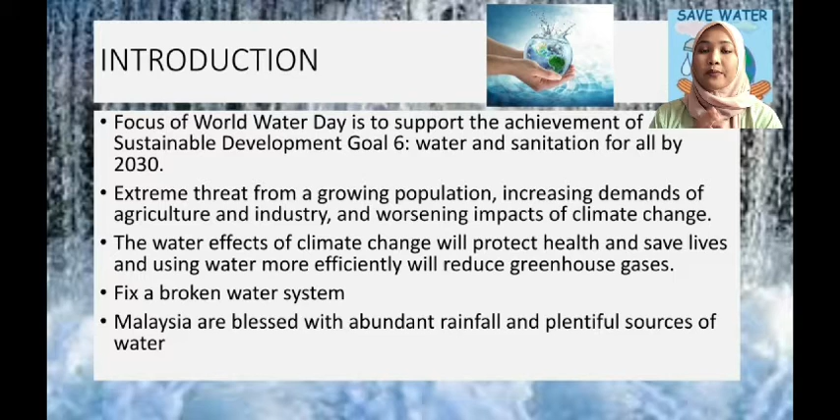Rainfall is seasonal and does not fall evenly throughout the country, as a result of typical rainfall characteristics as well as other climatic and physical factors which govern rainfall patterns. Malaysia gets an average rainfall of

2.94 meters per year. About 43% of that returns to the atmosphere through evaporation, 6% percolates into the ground, and the remaining 51% flows away as surface runoff.

The agriculture industry is the largest user of water, requiring up to 68% of total water consumption for paddy irrigation, other crops, livestock, and fisheries.

Lack of reserve water is the most important concern in most states. Each state must have a reserve margin of between 8% and 12% for the system to function efficiently. We can have more than 15% reserve water if the system is well planned and managed.

Unfortunately, our reserve is currently less than 2%, which is critical, because when a shutdown occurs, thousands of households have to go without water. Actually, we don't have a water shortage problem, but we have neglected upgrading the system.

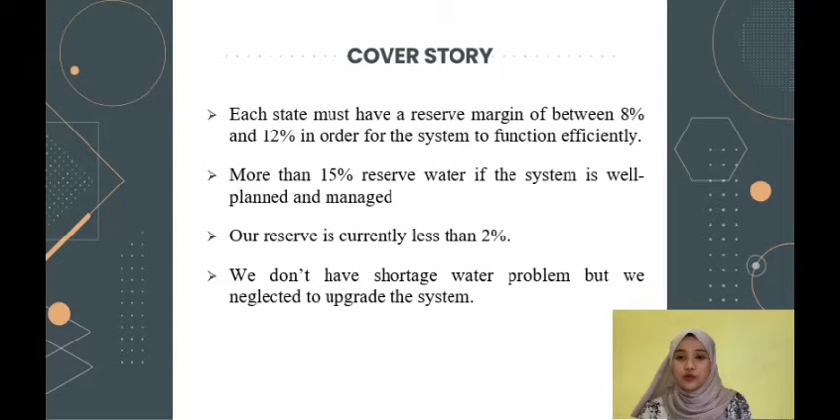However, with a reserve of at least 15%, the majority of households can have water supply for 40 to 70 hours in the event of a shutdown.

One of the most persistent issues in the local water system is non-revenue water. Non-revenue water is water that is pumped or produced but subsequently lost or otherwise unaccounted for in the system before it reaches the consumer. Non-revenue water levels are very high, with the national average at 35%.

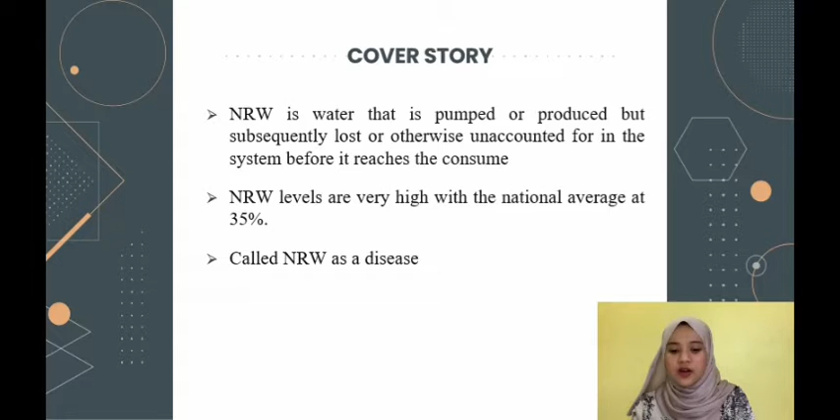Malaysia has developed a Water Demand Management, or WDM, to ensure more efficient and long-term water consumption. It is focused on reducing non-revenue water, using water-saving equipment, utilizing alternate water resources, and conducting water audits for large water users.

Actually, we should be using 170 to 180 liters daily, but each individual uses 220 to 230 liters per day.

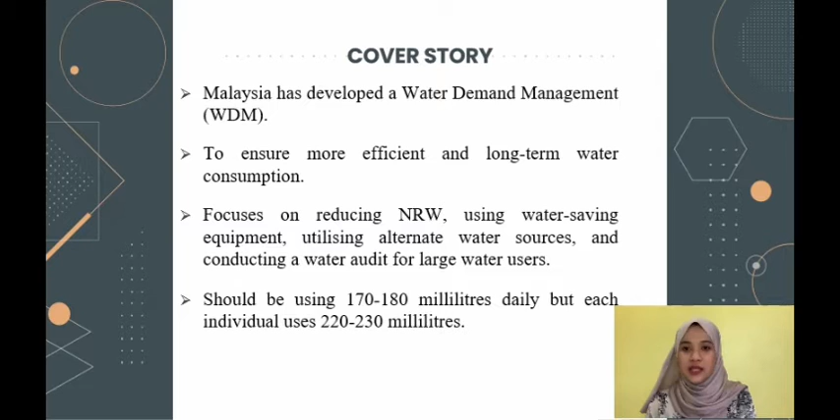Malaysia is also exploring alternative water supply sources. Right now, they are looking at all possibilities, from rainwater harvesting and storm water storage to off-river storage and coastal reservoirs.

All of this can be planned, but we need the resources to do it, as well as enough water flowing down the rivers for storage before we can figure out how to transform it into drinking water, industrial water, and agriculture water.

Actually, we have the technology to find underground water, but the technology is changing all the time, so engineers always need to keep up to date.

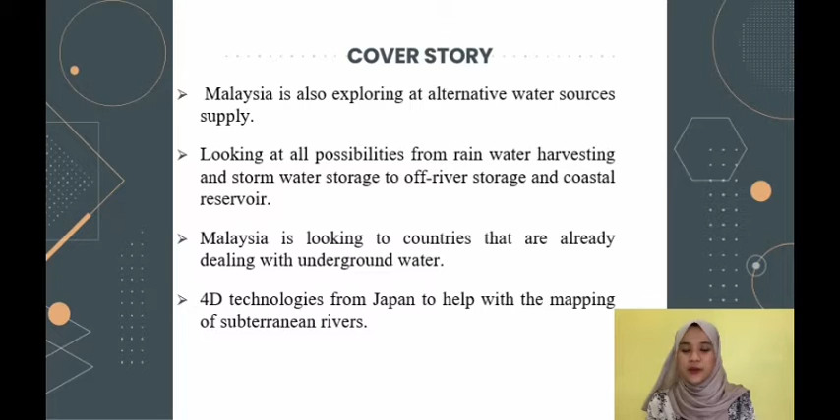Malaysia is looking to countries that are already dealing with underground water. We have the 4D technologies from Japan to help with the mapping of subterranean rivers.

To protect the water resources, the introduction and application of total maximum daily load, TMDL, for each river basin is obligatory. TMDL is a computation that determines the maximum amount of pollutant that can enter a water body in order for it to satisfy and maintain water quality criteria for that pollutant.

Total maximum daily load is still new in Malaysia, but it has been practiced in the most developed countries such as the United States of America in the management of water bodies. Overall, we want engineers and planners to keep up with the latest technologies, which they need to advise the federal and state water department on the right technologies to use.

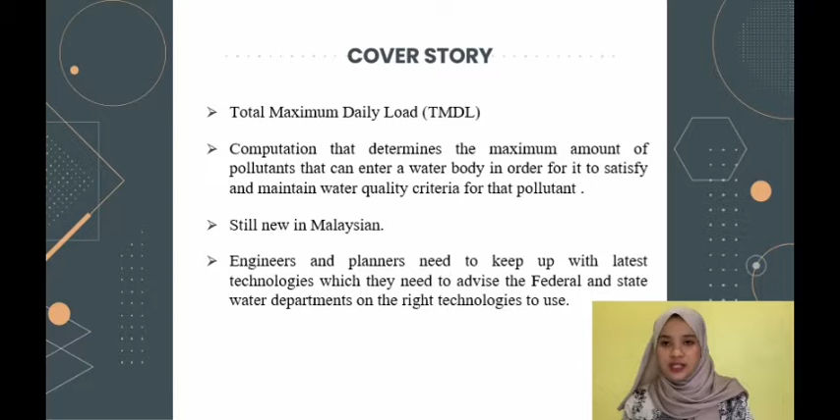Today I want to present about why we need a better flood forecasting system. We need a better flood forecasting system because in Malaysia, flooding is the most common natural disaster, and it affects 18% of the country annually.

There have been records of major floods, as we know: 1926 for the whole country, 1963 in Sarawak, 1970 in Kelantan, and every state has been affected by flood.

The Permanent Flood Control Commission was established by the government to investigate long-term flood mitigation methods. One of its responsibilities is to set up rainfall and water level stations to monitor and transmit data as fast as possible to obtain flood forecasts.

The flood forecasting model has made major progress by combining complex and people-oriented models to achieve better and more accurate flood forecasts, thanks to the latest technology in rainfall forecasting and increased accuracy of surface topography data.

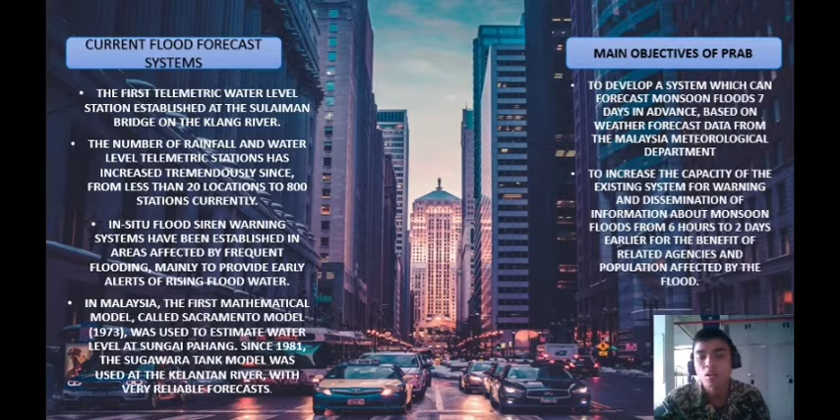The main objective of PRAB is to develop a system which can forecast monsoon flood 7 days in advance based on weather forecast data from the Malaysia Meteorological Department, to increase the capacity of the existing system for warning and dissemination of information about monsoon flood from 6 hours to 2 days early, for the benefit of related agencies and the population affected by the flood.

There are a few components to be implemented in an integrated manner using the latest technology: hydrological data detection system, database and ICT infrastructure system, flood modeling and forecasting system, and flood warning and dissemination system.

There is a platform website called Info Banjir that presents and spreads real-time flood information to the public. The website was launched in 2000 and is constantly updated to match current expectations and to accommodate new technology.

The PRAB website will be enhanced with the addition of two additional features. The first is to create a more informative and accessible user interface, where rainfall and water level statistics are displayed in a simple and accurate manner on the web.

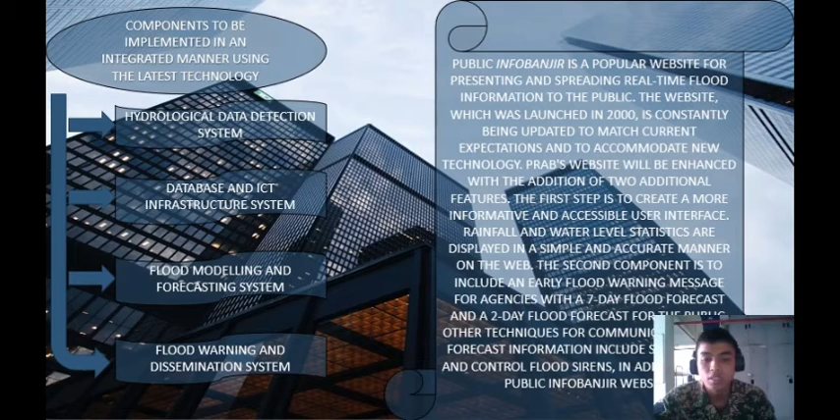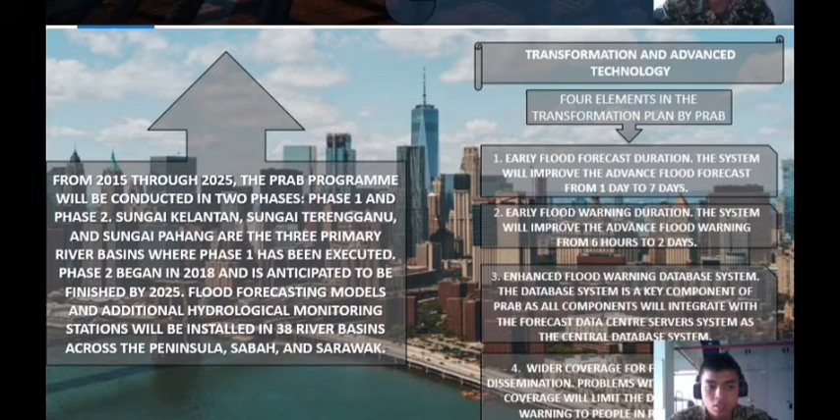The second component is to include an early flood warning message for agencies with a 7-day flood forecast and 2-day flood forecast for the public. Other techniques for communicating forecast information include a control flood siren. For our information, from 2015 through 2025, the PRAB programme will be conducted in phase 1 and phase 2.

Sungai Kelantan, Sungai Terengganu and Sungai Pahang are the three primary river basins where phase 1 has been executed. Phase 2 began in 2018 and is anticipated to be finished by 2025.

Flood forecasting models and additional hydrological monitoring stations will be installed in 38 river basins across the peninsula, Sabah and Sarawak, as part of transformation and advanced technology. There are 4 elements in the transformation plan by PRAB.

First, early flood forecast duration: the system will improve the advanced flood forecast from 1 day to 7 days. Second, early flood warning duration: the system will improve the advanced flood warning from 6 hours to 2 days.

Third, enhanced flood warning database system. The database system is a key component of PRAB, as all components will integrate with the forecast data center server as the central database system. And lastly, wider coverage for the flood dissemination.

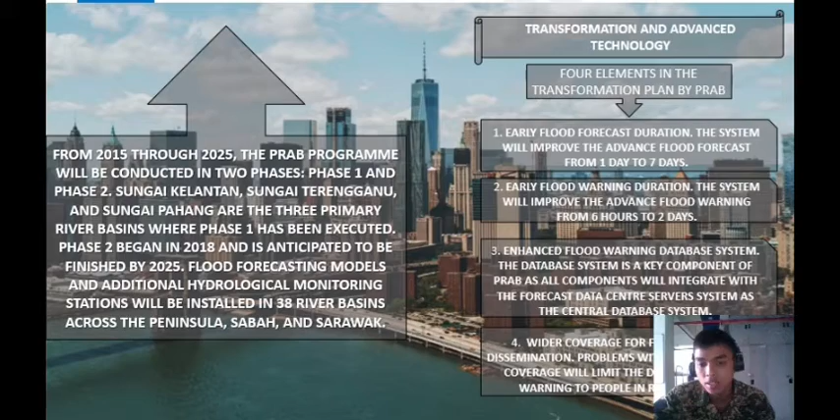There are some issues and challenges in the implementation of PRAB. First, one of the challenges is to have locally created items with locally sourced material and local professionals innovating.

Second, a flood forecast model developed in the United Kingdom has been used by PRAB, allocating a set amount of financial resources to license and technical assistance, which will result in considerable long-term loss.

However, developing our own flood model is difficult because, according to the existing model developer, it takes a great deal of experience and a long period of development. It takes about 20 to 40 years to develop it.

Third, almost every month, flash floods occur over a relatively brief period of time, 1 to 6 hours. In addition, the affected areas are small. As a result, a flash flood early warning system is required, and state-of-the-art technology using radar and satellite can be investigated.

And lastly, the current delivery method should be upgraded to reflect effective stakeholder interaction, which will aid the understanding of the issue of flood forecasting, transmission of more targeted information to the public.

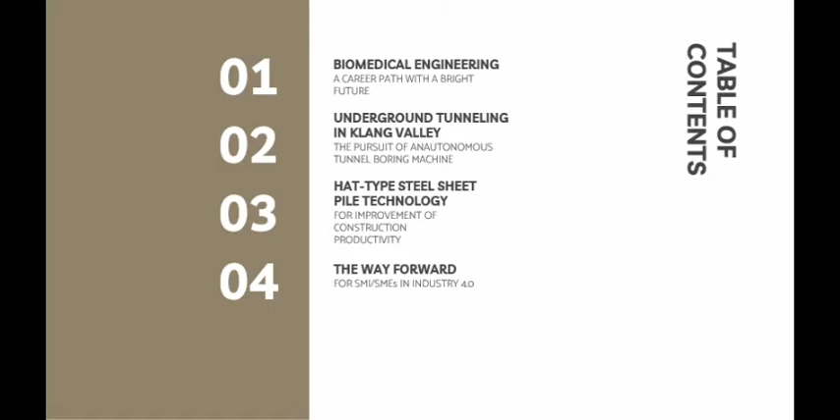For the first forum, the speaker shares about biomedical engineering, a science, technology, engineering, and mathematics career path with a bright future. The government has been encouraging STEM even in primary school, as it has implications on workforce development, national security concerns, and immigration policies.

Biomedical engineering involves applications of engineering principles and design concepts to medicine and biology for healthcare purposes. Biomedical engineers can work in research and development activities focusing on next generation products, innovation, and strategic planning.

The second forum is underground tunneling in the Klang Valley, a talk by Ir Nanthakumar. 60 participants attended the technical talk on underground tunneling in the Klang Valley.

Ir Nanthakumar presented the general scope of design works on the KVMRT project at Malakoff Auditorium. He discussed the various geologies and construction methods used, as well as the tunnel interface procedures, and highlighted the various risks associated with tunneling.

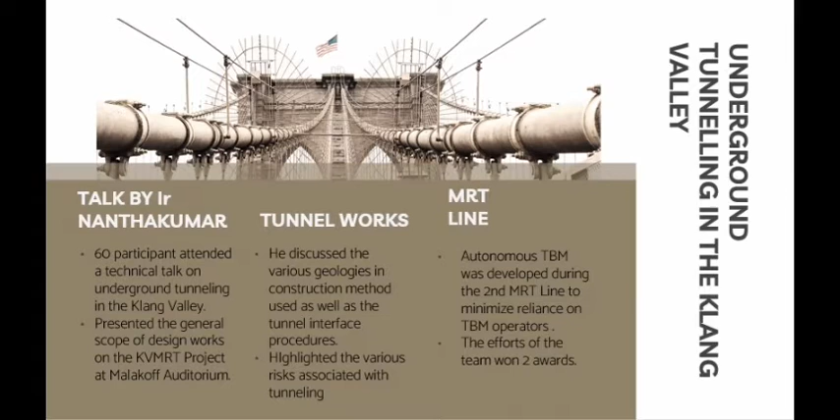Autonomous TBM was developed during the second MRT line to minimize reliance on TBM operators. The effort of the teams has won them 2 awards.

The third forum is about hat-type steel sheet pile technology. The Civil and Structural Engineering Technical Division hosted an evening discussion on hat-type steel sheet pile technology for improving construction productivity in Malaysia, and invited Dr. Kazutaka Otsushi to be the speaker.

He is in charge of research and development, market development in ASEAN, and technical support of steel sheet pile technology, design and construction in Singapore.

Dr. Kazutaka Otsushi spoke about the introduction of hat-type steel sheets, the reduction factors for ERSS designs, the actual scale field tests, and track records of hat-type sheet pile and installation method.

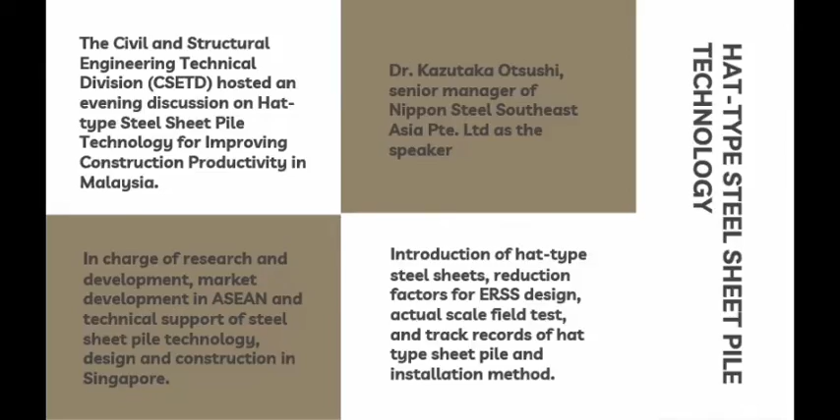The last forum is about the way forward for SMEs in Industry 4.0. Building the Industry 4.0 ecosystem is a huge challenge because of the scale and complexity of converged networks and joint developments in the platforms.

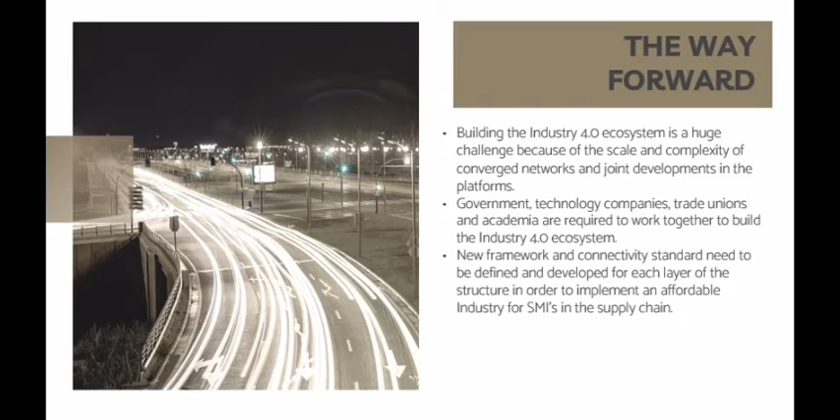Government, technology companies, trade unions, and academia are required to work together to build the Industry 4.0 ecosystem. New framework and connectivity standards need to be defined and developed for each layer of the structure in order to implement an affordable industry for the SMEs in the supply chain.

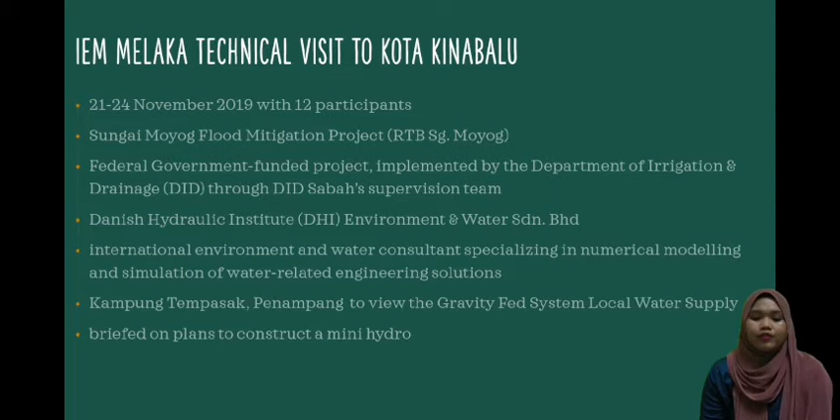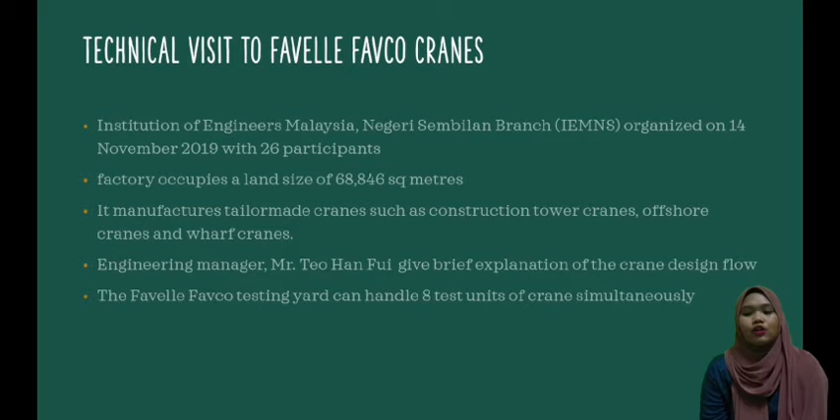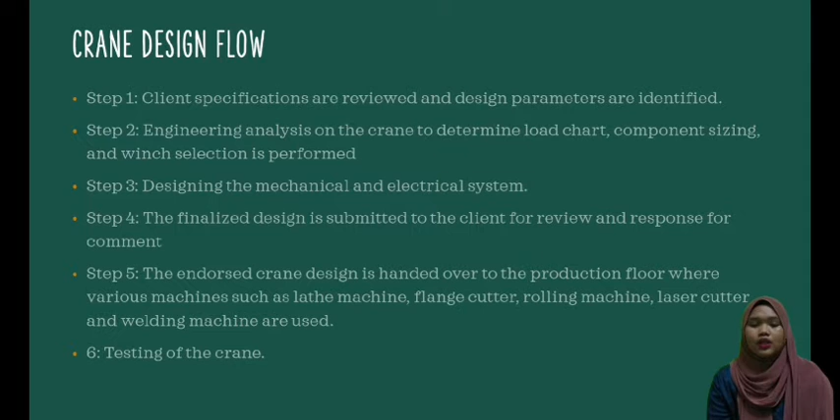Step 5, the endorsed crane design is handed over to the production floor, where various machines such as lathe machines, flange cutters, rolling machines, laser cutters, and welding machines are used. Lastly, the crane is tested.